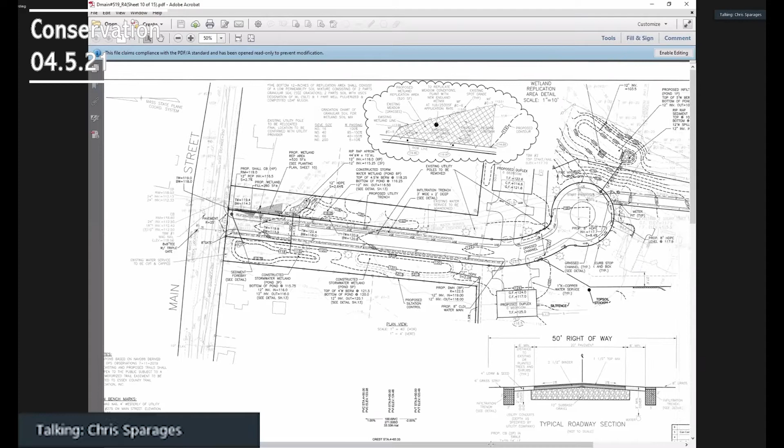Chris? Yes, hello Madam Chair, Chris Sparages from Williams and Sparages. How's everyone tonight? Good. So we were last before the commission back on the 16th of March, and at that meeting I know Ms. Reed had several questions. We had a bit of back and forth question and answers on the stormwater management areas, various aspects of them. And towards the end of our discussion, Ms. Meisner asked if there was any way we could increase the size of the wetland replication area.

And on this particular project, we have an opportunity to do that. We have some extra room available, it's an existing open meadow. I don't mind making it bigger because we don't have to take down any trees. So Ms. Meisner asked, well, could you double it in size? And I said, I think we can. So we went back and revised the replication area in this open meadow by just taking the grade down a little bit to match the elevation of the wetland flags nearby. Again, it's an area that doesn't have any trees.

On this revised sheet, which I think Bert's got up on the screen, the wetland replication area is shown in a hatch symbol, and up above is a blow-up at 10 scale. It shows the wetland replication area now at approximately 520 square feet. The members were okay with us making it bigger, and so we did that.

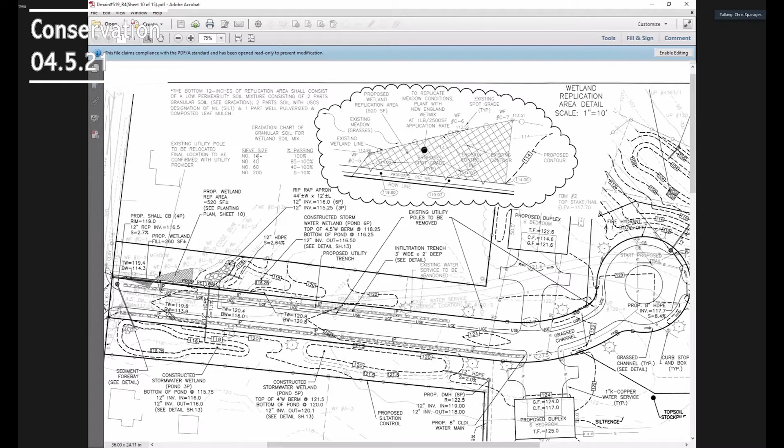And I believe the last thing Ms. Meisner mentioned at the meeting last time was that a draft order of conditions of some kind would be drafted up so we can talk about it tonight. I'm not exactly sure where we stand on that, but looking back at my notes, that's the only remaining item I had from the last meeting. Okay, great.

Bert, so you circulated the draft order internally, but it wasn't provided to the applicant. It was late, I had just sent that to you -- probably just about a half hour ago when I got back in. Okay, I've got access to my email here, I can certainly bring it up. Is that something you can share, Bert? Yeah, I've got a copy of it here.

Bert, can you identify anything that's not our standard special conditions? There's nothing unusual from what I recall. I didn't think there was anything unusual in it. There were a couple other things Judy had brought up when she emailed me. I don't know if we want to go over those now, or take a second to let Chris look at these special conditions and see if anything jumps out. Yeah, kind of scanning through it. Can you go to the next page, Bert?

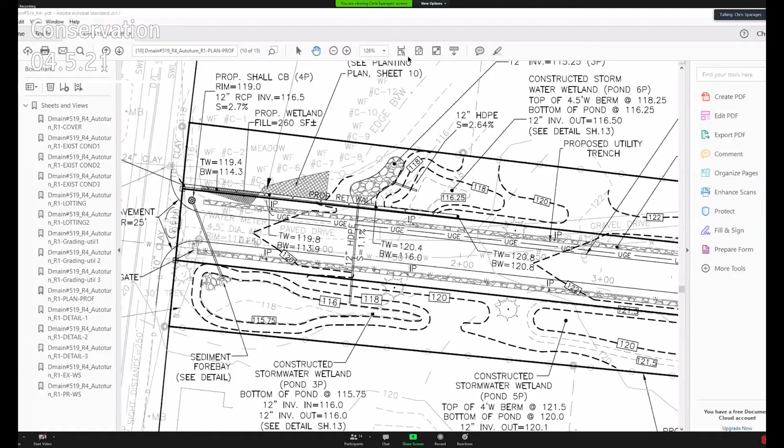Just to bring up that PDF again of the subdivision, if I were to zoom out here, give you a better picture of the roadway. So the cross section of the roadway is right-of-way line, which is this dark line, to the other dark line is a 50-foot right-of-way. And then inside the 50-foot right-of-way is only 20 feet of pavement right in the middle. And so there are places left and right of the proposed edge of pavement within the right-of-way where snow can be stockpiled left and right of the edge of the pavement without impacting the stormwater management areas, which are all beyond the right-of-way. And then we've also identified another snow collection area in the landscape island here at the cul-de-sac. So for the small 20-foot wide width of road, there's plenty of room left and right of the road as you come down to stockpile snow.

And if you wanted to throw something in the order, I would encourage the commission to make sure that everyone's on notice, not to stockpile snow in any of the stormwater management areas.

And there really should never be a need for that. We just don't have that much pavement on this project to worry about people dumping snow everywhere. In this particular project, we have the luxury of a relatively long stretch here where you're not in front of homes, and there's a lot of area to work with.

That's me. Good evening, everyone. For the record, Greg Hochmuth from Williams and Sparages, representing Pat Kelly for the notice of intent filed for one of her lots, to the right of her existing house, known as 34 Ash Street.

At the last public hearing, we presented the project and we requested a continuance to allow us time to conduct a site visit, which we had a couple weeks ago. We met out there on a Sunday morning and looked at the area of the proposed crossing, and also walked up further into the lot so I could show the commission where the house is actually going to be proposed. It's quite a ways from the road.

When you look into the lot beyond the Christmas trees, the tall ones, where you start seeing some of the hardwoods, the house would be proposed right in front of those. So all those trees in the lower field would remain. I told the commission at the last hearing that I'd submit our calculations for the culvert sizing, as well as the calculations for a little area - I'm just going to see if I can draw on here.

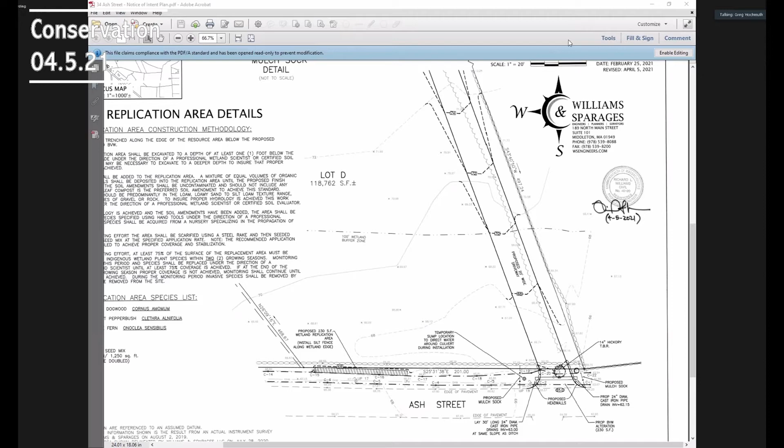Actually, I don't think I can. You should be able to now. I can, okay. Would it be okay for me to share my screen, Bert? Yep. Yeah, I made you a co-host, so you should be able to share your screen. All right, let me try that. Yeah, here we go.

I'll use blue. So there's a little puddle that forms, kind of in this area. What I told the commission I'd do is we'd do calculations just to show that that area doesn't meet the definition of isolated land subject to flooding, similar to the two projects before the last one. We've done that, and I'll go through those calculations in a minute, but there are really two criteria: the area has to generate at least a quarter acre-foot of volume, and then it has to be to a depth of 6 inches.

That lower puddle, I'll call it, can only fill up so high before it spills through the wall, so the deepest it could get is about 8 inches. So it could technically have the depth of 6 inches, but the subcatchment that I'll show you in a minute doesn't generate anything close to a quarter acre of volume - it didn't even pass the first criteria. The calculations we did were done by an engineer in our office. I just want to pull up one thing here first.

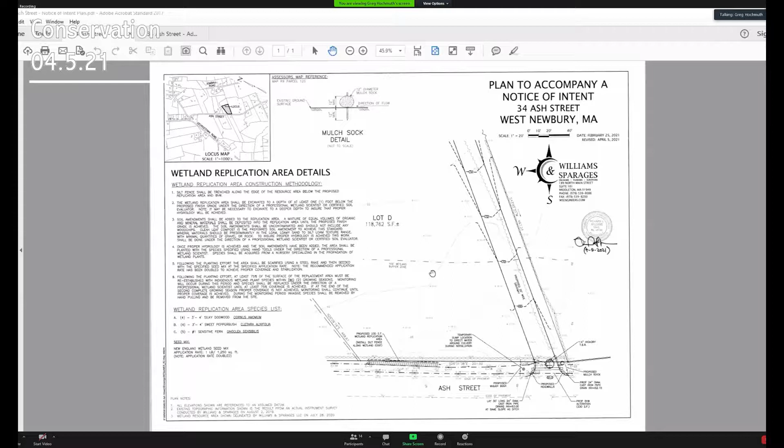Let me just bring this plan up for a minute. So that area we were talking about was right in here. Over the years, Pat and everybody that's farmed the property have realized that driving along the stone wall is really the safest spot to drive, especially this time of year. It's not as soft, and that's exactly where we're proposing the driveway, along this stone wall.

We're planning to keep everything in that lower field alone, but keep the proposed driveway far enough off that wall between the horse property next door so all those hardwoods can stay. There's a pretty good row of trees along that wall, and it just makes sense to keep them.

One thing that's happened since the last hearing is we got some comments from DEP, and it's hit or miss with DEP. We've done probably a half a dozen projects very similar to this, where we've just proposed a culvert in the ditch without any replication, and we've described the ditch as a finger-like projection. The regs allow the discretion to not require replication in situations where it's a finger-like projection, or in this case, a drainage ditch.

But DEP dug their heels in on this, and they were very clear that they do want replication. It's hard to argue with them because it technically is BVW, and in their opinion this doesn't qualify as a finger-like projection. I think I could argue it either way, but I talked to Pat, and she said just propose the replication if that's what they're looking for.

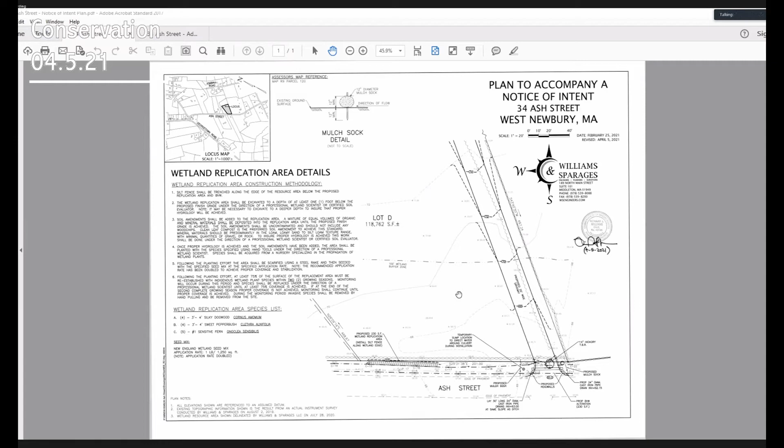Then the question became, where does it make the most sense to propose the replication? The inland wetland replication guidance document likes you to try to replicate the wetlands as close to where you're altering as you can, for obvious reasons. But in this case, doing that would wipe out a pretty good chunk of hickory trees growing here that are very, very healthy.

So we simply propose the replication area down a little further from where we're proposing to fill. It's only 230 square feet of wetlands, and that's all we're proposing to replicate. It's about a 3-foot section that would have to be cut out adjacent to the BVW, still on the street side of the stone wall, to create the 230 square foot wetland replication area.

In that spot, it's mostly multiflora rose, so it just makes sense. We can pluck out the multiflora rose, a row of silt fence would be installed along the BVW boundary, and we'd only have to lower the grade probably a foot at the most, because there's a naturally high water table in that area, and it just kind of seeps out of the side of that bank.

We're proposing to put in silky dogwood, sweet pepper bush, and sensitive fern. All should do really well. The silky dogwood does really well against drainage ditches or any type of ditch that conveys water, and it has a pretty good root system that will help hold that bank in place once it establishes itself.

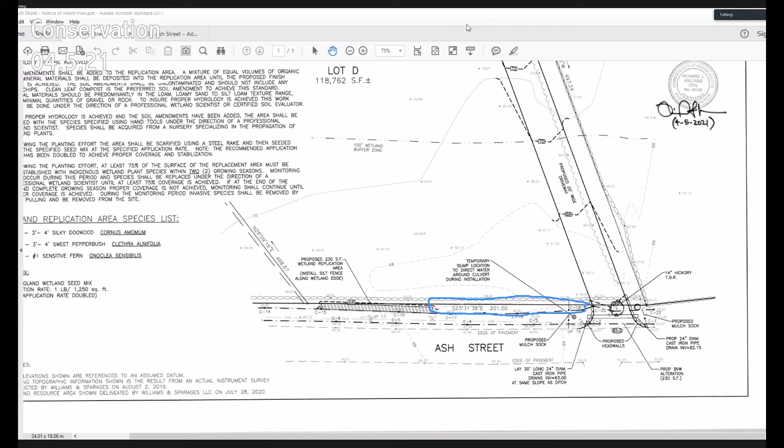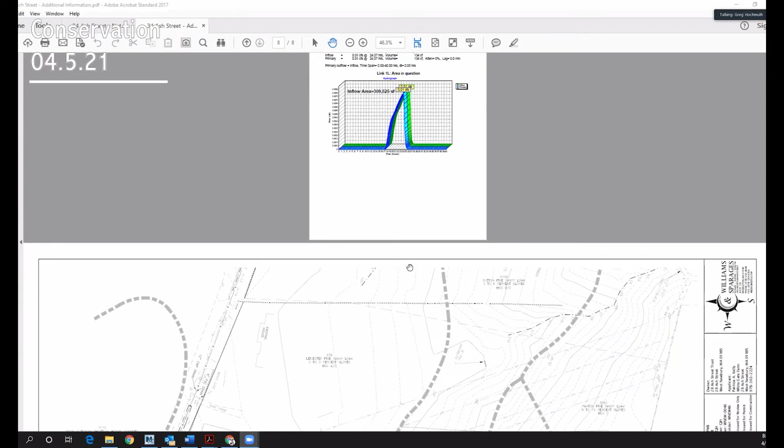Let's see what's here. So we ran this through HydroCAD, and all these calculations show the volume that contributes to that area, which is why we sized it as 24-inch and not 12-inch.

It seems a little odd to have a bunch of 12-inch culverts everywhere else, but then just one standalone 24-inch culvert. But who knows, maybe everybody else will upgrade in the future.

We are scheduled to go to the planning board at their next meeting to talk about the wall break. We met with Wayne out here to talk about the one hickory tree that would have to come down. Wayne wasn't ready to say it was a high hazard tree just yet, but he did say I could tell the planning board and conservation commission that it was very much on its way to becoming a high hazard tree. The root zone was almost half showing, and we saw that on the site visit.

So Greg, does the utility easement limit the replication area at all? So we've kept the proposed replication area outside of the utility easement, specifically for that reason. If they asked me if it had to go within the easement, I wouldn't be able to say yes.

One thing we mentioned at the last meeting is when we initially took on this project, it made sense to keep the driveway where the existing access point is, but that's within the easement. We'd have to traverse a lot of the easement to get to these lots on the right, and that was what prompted our conversation with National Grid.

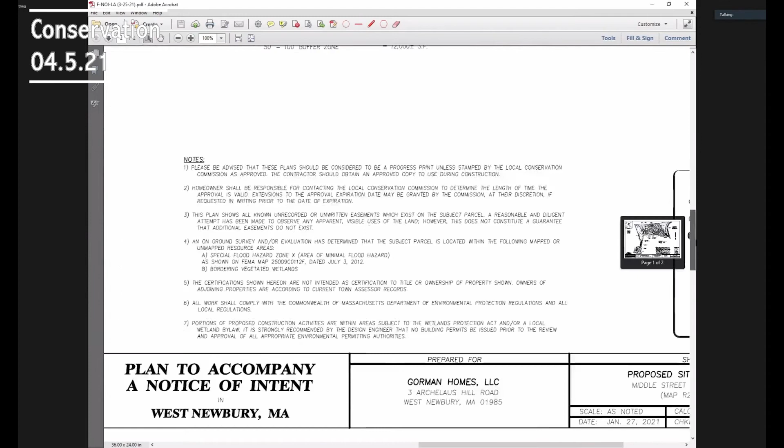So did you submit construction details for this wall? The retaining wall? I believe they're on sheet 2. Just let me check... Sorry, there is no detail for the wall. We can add that to the plan. It's just a 4-foot retaining wall, probably just our standard detail. And the fact that you're doing the work in a buffer zone, right? Yep, yeah.

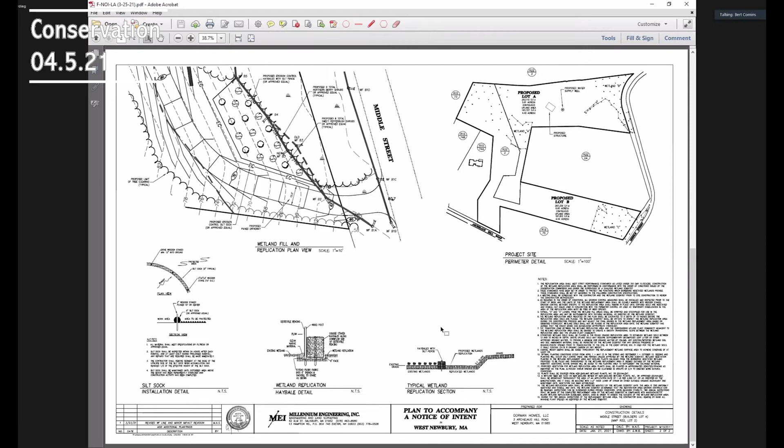So are there any other questions? What were we waiting for on this, Bert? Were there outstanding items that needed to be addressed other than the wetland flags? They were more on the other lot. If you have any questions, but we had the flags moved, those wall details, I think this covered about everything. The flags had to get removed off this plan. Unless there were any questions about the directional drilling up at the top of the site. Yeah, I thought they were going to add some details about that. We went over it on the site walk. I don't remember any specific questions that came out of it, but...

So DEP doesn't have any comments about the directional drilling? Not that I've seen. I guess just because it's a new thing for us to be considering. It seems to be something more and more common for residential development, popping up quite a bit. So I haven't seen any DEP guidance on this yet.

I wonder if the Board of Health would have any comments either. I don't know. I think some of the concerns were, what if the pipe breaks or becomes unstable? What are the implications? And the septic plan, I don't know if you guys have gone to Board of Health yet, but the septic plan would have to go to the Board of Health. Yeah, they would be reviewing the plan. We've met several times with Paul, kind of informally, he's seen the plan a handful of times. So that's been on the table from day one with our design.

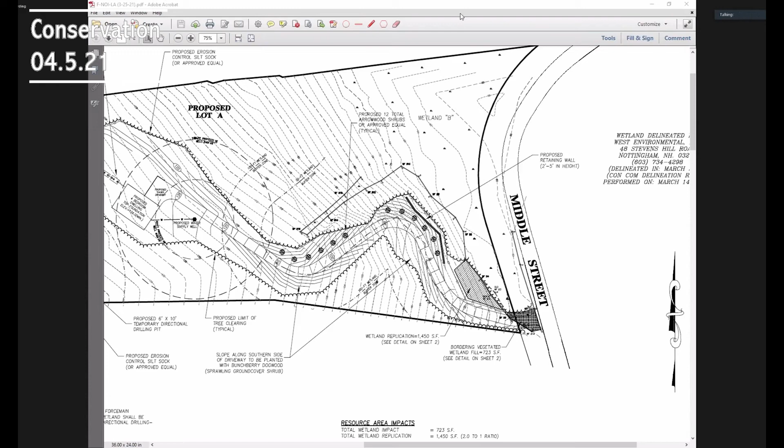So we'll also open continued public hearing, notice of intent, DEP file number 0780726, Gorman Homes LLC, Middle Street, Assessors Map 22, Lot 2, Builders Lot B, construction of driveway, wetland fill, and replication.

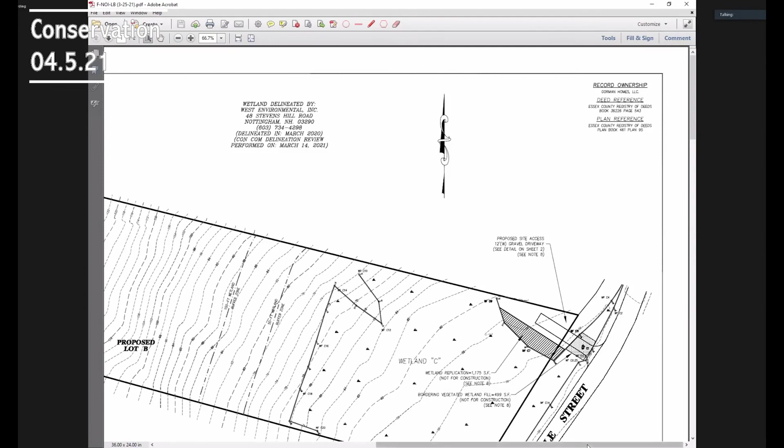So what would... sorry, go ahead. Do you want me to give a brief overview of what we've changed? Sure. Again, TJ Melvin with Millennium Engineering. So we minimized the grading along either side of the crossing to reduce disturbance to the wetland. It's pretty much designed at the minimum right now.

We left the proposed replication area the same, so we're a little over 2-to-1 replication. That's really the majority of the change. I believe the old plan may have shown work upslope, but we've since removed that as it was all out of the buffer zone. Ultimately, this is very similar to the original plan that was submitted.

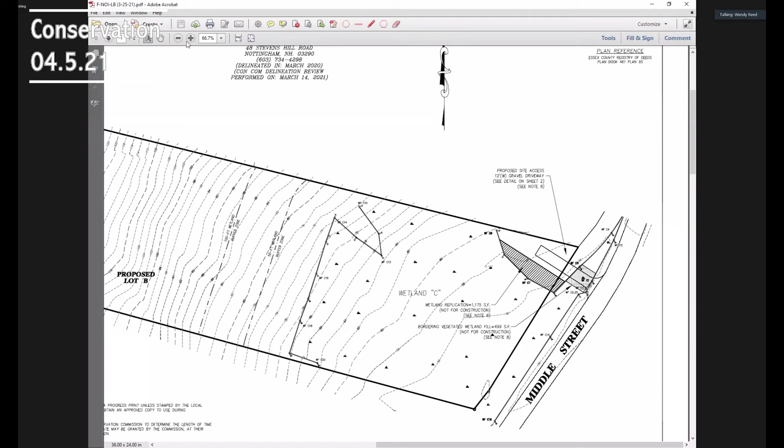Can we look at the detail on lot sheet 2, Bert, for the parking area or whatever it's called, the driveway?

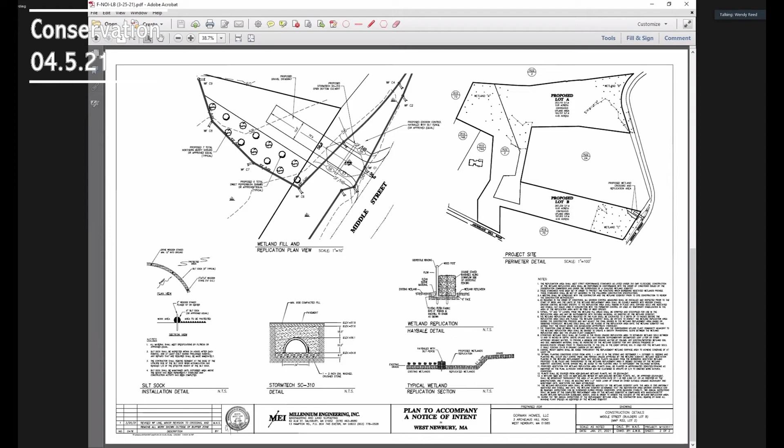And what were DEP's comments on this, Bert? So DEP's comments on the original plan that was submitted, if you remember, the plan showed it was out of the buffer zone. It showed the house being proposed, septic system, and then it also showed a driveway coming off of Archelaus Hill Road.

In DEP's comments, they basically questioned whether this would qualify as a limited project, and what would justify filling wetlands when an alternative access to the lot is shown. I know we've sort of gone back and forth quite a bit about why that is, but that was the bulk of DEP's comments.

And so, Mr. Gorman, did you respond to the DEP's comments on this? Oh, we did. Millennium actually responded to the DEP, and Jeff Roloffs, who's on tonight as well, an attorney, responded to the DEP comments.

And was there any follow-up from DEP? Are they satisfied with the responses? There's nothing back from DEP at this point. And when were they submitted, your responses? I believe it was 2.5 weeks ago. Okay.

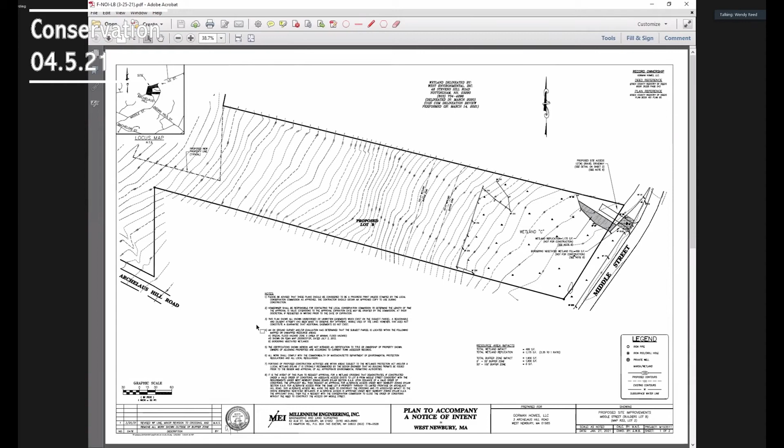Let's see, I think we probably have people from the public that might want to comment. Can you take down the plan, Bert? Mr. Baker, did you want to comment? We're going to wait till after this is continued, we'll speak in the next meeting. Okay, any other members of the public wish to comment on this matter?

Wendy, I did have one thing, or a couple things from Judy. She was wondering if it would make sense to amend the notice of intent filing if the applicant doesn't want to proceed under limited project status. If there should be an amendment from the NOI stating that. Yeah, I believe we could resubmit the paperwork showing we're not filing under a limited project. Yeah, I think that would make sense to do.

And the other concern was, I know there'd been in some letters before, there was talk of a condition on the project that would basically say, this is about Lot B, that the work on the driveway not be done, and a certificate of compliance be requested once the alternative access is obtained. I think there's just some concern about whether that's a reasonable condition, that that's something that could actually be put into an order of conditions. This is sort of an unusual filing. That's not something that, to my knowledge, has been put into an order of conditions here. So I don't know if there's any other orders that has had something like that maybe you could point to.